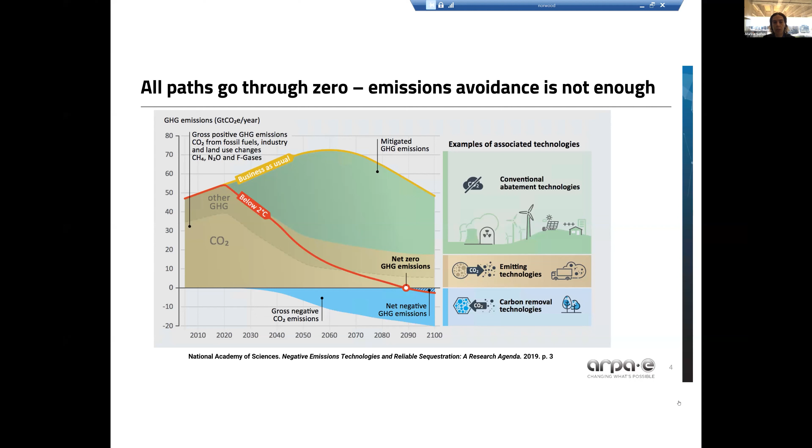And so it was with this motivation in mind that we looked at where the built environment could play a role in terms of serving as a carbon sink. So moving to the next slide. And really negative emission technologies are going to rely on a whole suite of carbon removal approaches, everything from biological strategies such as forest and land management and soil carbon sequestration, along with engineered approaches such as direct ocean capture and direct air capture. And this is where buildings can play too in these hybrid approaches and serving a dual function.

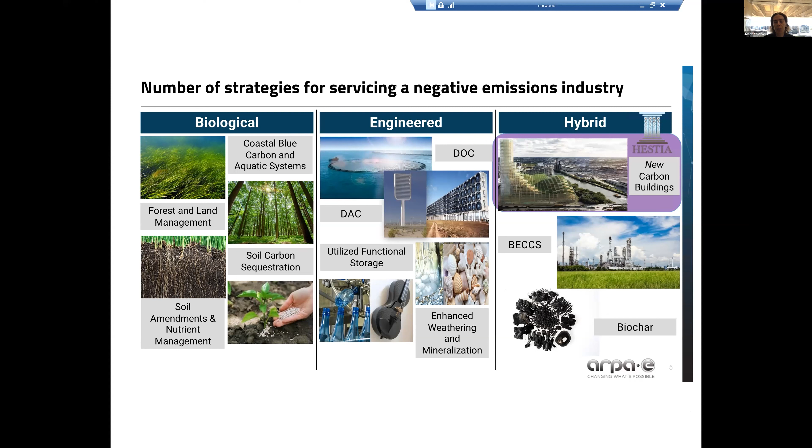We have to continue building carbon-based products in the form of our built environment. And there's an opportunity to really expand the way in which we think about our feedstocks, particularly in terms of utilizing atmospheric CO2. So the next slide. And that's really where the HESTIA program comes in. What we're trying to achieve here is really addressing a lot of the barriers today to CO2 derived building products. In particular, the fact that there are a number of promising materials out there that are emerging in use that many of you work with and look at as part of your projects. But there are limitations in terms of code compliant options.

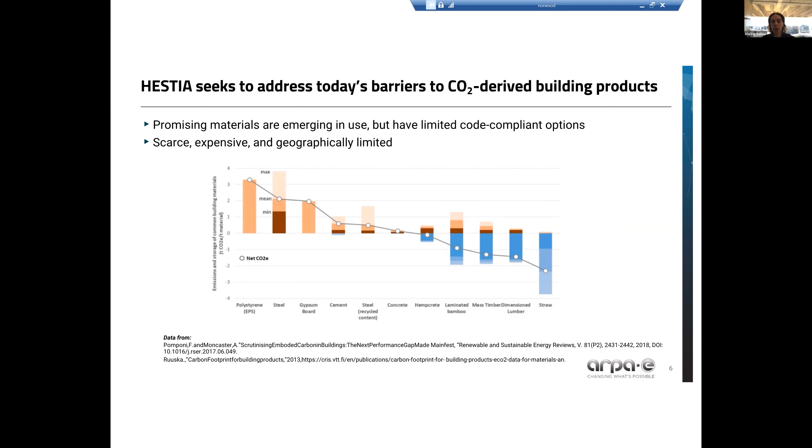And so we were really looking at what are ways in which we can expand the options here and address some of the scarcity, high cost or geographic limitations in these types of materials with an eye towards market adoption, and because codes really form the basis for material selection in building design and construction, that ultimately was the way in which we were looking at formulating the program. Next slide. So the program itself is a $45 million effort. The projects themselves were selected this past summer and are now under contract and beginning work.

And really, what we're looking at through a variety of approaches is trying to investigate a wide range of feedstocks, everything from purpose-grown forestry products to agricultural residues and byproducts from biomass processes to direct CO2 derived products. And the program itself is focused both on developing new carbon negative building materials, as well as taking existing carbon negative materials and designing new whole building designs that leverage the carbon storage properties of the material to maximize their potential, and then really thinking about extending the lifetime of the building and the overall efficiency of those designs with an eye towards designing for disassembly and reuse.

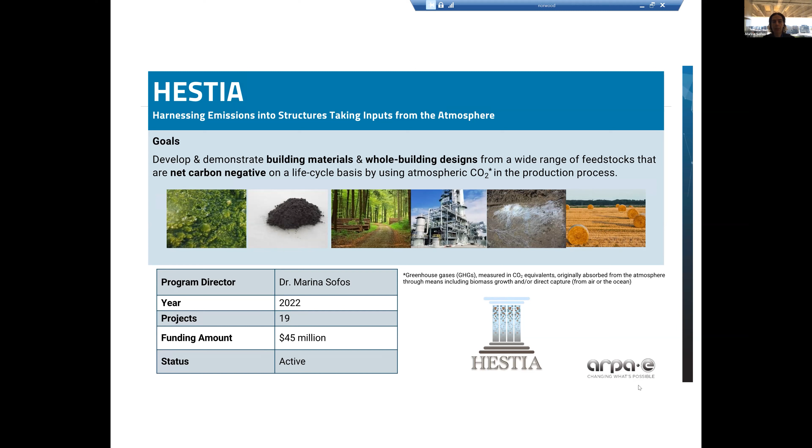Next slide. So within the program, we took an approach of considering both strategies in the form of mineral-based materials that can store carbon on a centuries time scale and are more permanent, as well as biogenic approaches that can store carbon on the order of decades. And the reason for this is twofold. One being that bio-based feedstocks can offer us the opportunity to really buy us time between now and 2030 or 2050 in terms of storing as much carbon as possible in the near term as negative emission technologies more broadly mature and advance and are implemented, and then provide pathways in which that more temporary storage could become more permanent.

The other reason to look at and expand some of the sources of biogenic approaches was from the perspective, particularly when we're looking at waste, byproducts, and residues. Converting into a building product offers the opportunity to store that carbon for potentially longer than if that waste or residue were to sit outside and slowly degrade and re-emit into the atmosphere. And I should also note that within the program we are including the source of the atmospheric CO2, being very specific there in terms of the overall life cycle analysis, which gets to our next slide.

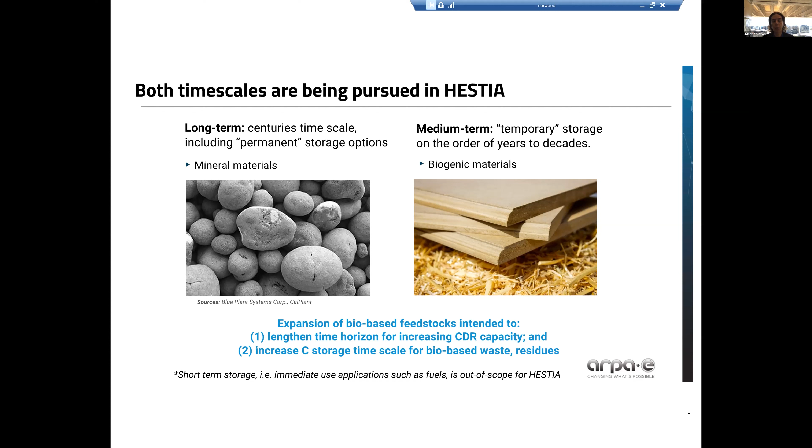So the life cycle analysis is really the method of evaluation here, with the goal, as I mentioned, on the material side, achieving net carbon negativity, meaning that the embodied emissions is less than the atmospheric greenhouse gases that are captured and stored in the material itself over the specified time period, which is in the finished product.

And then the operational energy performance is maintained or exceeded, so there's no gate to grave emissions that are exceeded from the current incumbent. And then on the building design side, the goal is achieving carbon negativity at that whole building level, where the total embodied emissions and operational emissions are less than the atmospheric carbon that's stored in the materials of the building itself.

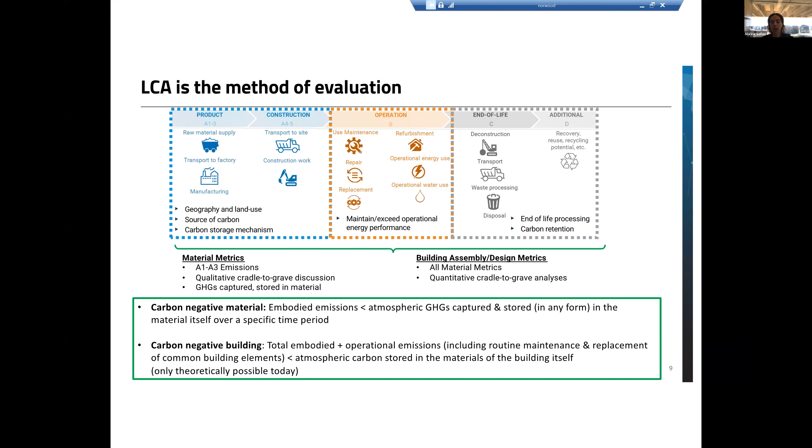And so these are both very, very aggressive targets here, but really with the eye of thinking about that whole life cycle all the way out to the end of life. And so the factors that are considered within the LCA include the geography and land use, the source of carbon, the mechanism of carbon storage, and then all the way out to end of life and the carbon retention. Next slide.

We have, in addition to the life cycle analysis targets, as I mentioned, the cradle to gate carbon negativity with no increase to gate to grave emissions at the material level, and cradle to grave carbon negativity at the whole building level. The additional performance requirements and metrics are really with the eye towards ultimately market uptake and adoption.

So each team will have to perform the relevant performance testing for the specific building element that they're choosing or targeting based on what those incumbent specifications are. And so they have to develop a sufficient number of prototypes and prototype sizes with which to perform those preliminary tests. And they also have to show some type of a market advantage to be able to be considered in the future for new projects. So this could be anything from the performance, the operational energy usage, lower cost or easier installation.

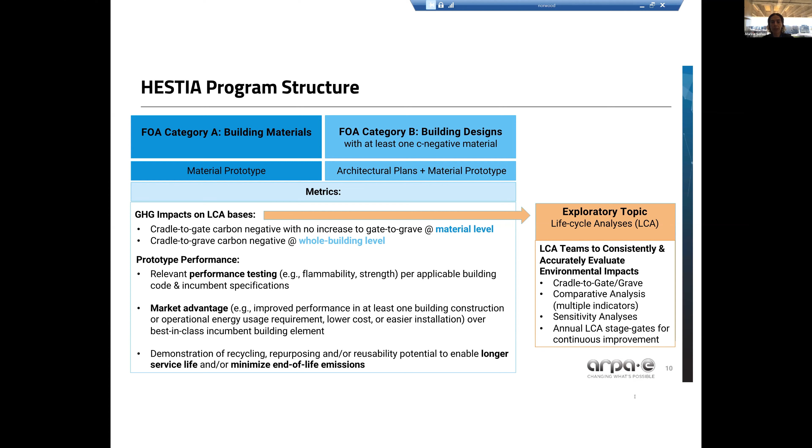Next slide. So first off, we have the life cycle analysis component. This is an effort in and of itself within the program. It's being led out of the University of Washington and University of California, Davis is also providing some tool development.

And the aim towards the life cycle analysis is really to build out capabilities that are necessary in the future for these types of materials and designs, including development of spatially explicit LCA models to be able to better model regional differences, things like land use change and regional cultivation techniques that are really key to biogenic materials, as well as tracking emissions and uptake over time through dynamic LCA, which is obviously also very critical from a carbon storage and release perspective. And then finally dealing with a lot of uncertainty with new novel materials and developing ways to predict LCI based on material properties. And this is where they are going to be working very closely with the materials and design development teams.

And so two of the key features here, which I'd like to note, is that we have a built-in semi-annual peer review process, and we would love to work with a number of you in the future to get feedback, as well as having really strict data protection clauses between the teams if and where they're exchanging information.

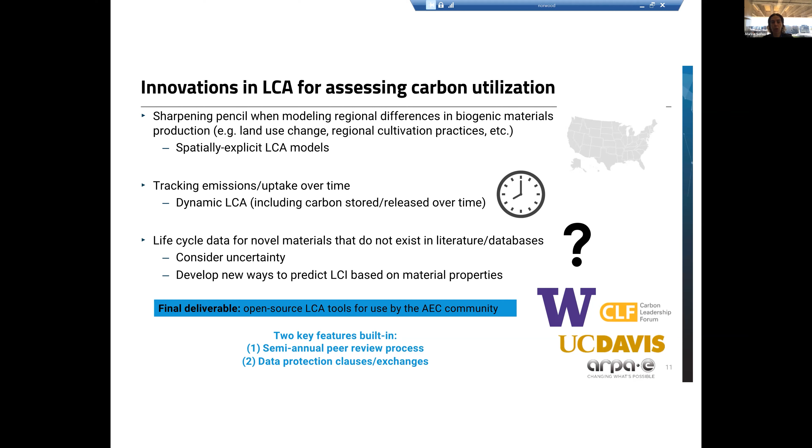Next slide. And so really we have this kind of handshake going on between the LCA teams and the rest of the HESTIA teams in terms of providing the minimum amount of novel data that the teams are developing through their materials and designs to feed into the LCA tools and capabilities that the University of Washington is developing. And then similarly providing that feedback back to the material and design teams who are being evaluated based on their net carbon negativity.

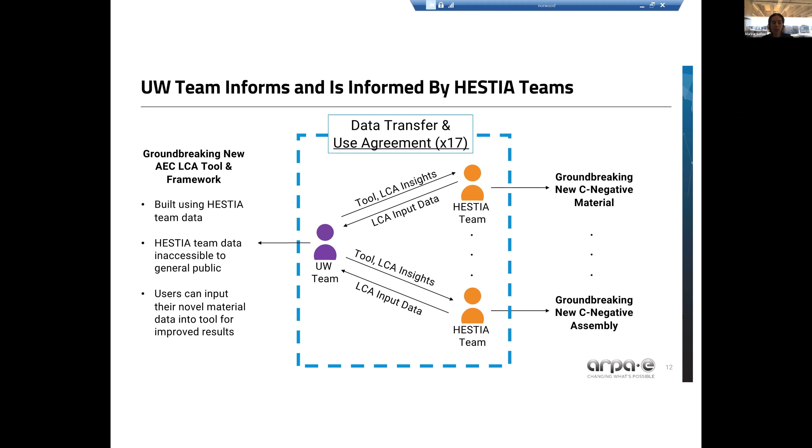The life cycle analysis itself for the teams is being conducted by them. And the University of Washington team is developing data transfer and use agreements with each of these teams. So the tools and the capabilities that they're developing do not include any data access to the general public, but they're using that information to build out these capabilities, ultimately with an aim of being open source and being something that lives beyond ARPA-E funding and is something that's utilized by the AEC community.